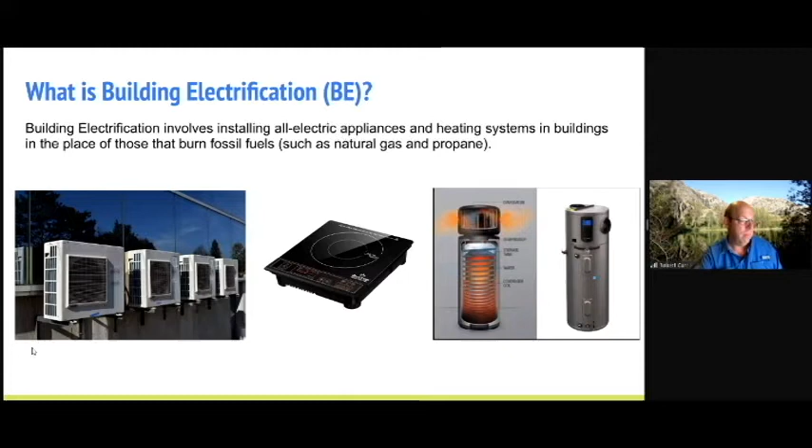So why is it so important? Well, as we know, we need to start reducing the amount of emissions, CO2 and methane, we put into the atmosphere. Many cities have really strong climate action plans and GHG reduction targets. And none of those can be met unless you actually deal with the emissions associated with buildings, essentially. And methane gas is one of the main things one targets.

Health benefits. If you have a gas stove, please turn on that vent that should be above it. Because when you burn natural gas, the byproducts are nitrogen oxides. There's fine particulate matter. There's formaldehyde, among several others. All of which have bad health consequences, especially if it's not vented to the outside. You're talking about lung issues, asthma, cardiovascular issues. The list goes on. It's quite extensive.

So if you do cook with gas, please use your vent. Use your vent and open the windows. And then when you get a chance, use induction cooktop stoves. Lower cost: when you build a building, if you do not have to install the gas infrastructure from the main line, wherever that is in the street, to the building and inside the walls, you're saving money. You just don't have to install that infrastructure.

Also, because of the increased energy efficiency of the appliances, they are cheaper to operate and run over their lifetime. Right now, there's lots of talk about natural gas being cheaper than electricity, but if you pencil it out, it's actually not the case in most situations. And then finally, the public safety of using methane gas in buildings. You have to extract it somewhere in the world. You have to process it. You have to ship it. You have to store it. You have to deliver it. And all along those lines, there's leakage, possibility for fires.

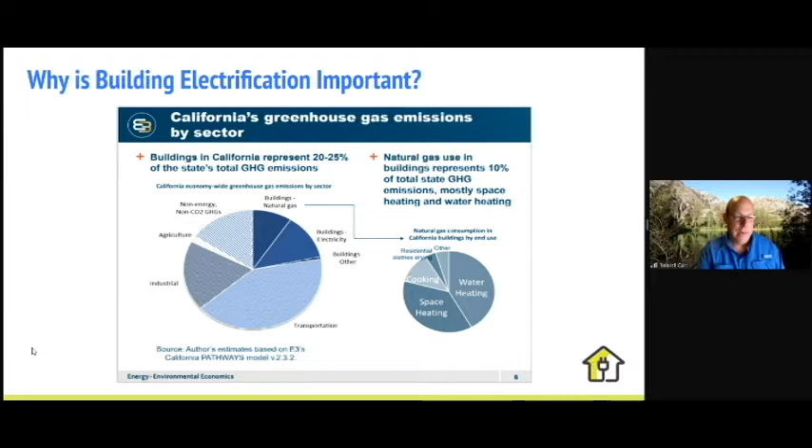And this is the last slide before I hand it off to Tom. So currently, right now, this was 2019. I think this is higher for sure. An estimated 36% of California's electricity comes from renewable sources, all right? And that should be up to 60% by 2030. And on the right-hand side, it shows that 63% of the energy in California is carbon-free.

So what is carbon-free? Carbon-free includes renewables, but also includes hydroelectric and nuclear, because neither of those two are renewable, but they are carbon-free. So if you add all that up, you've got 63% of our power is carbon-free, with 100% being the goal in 2045.

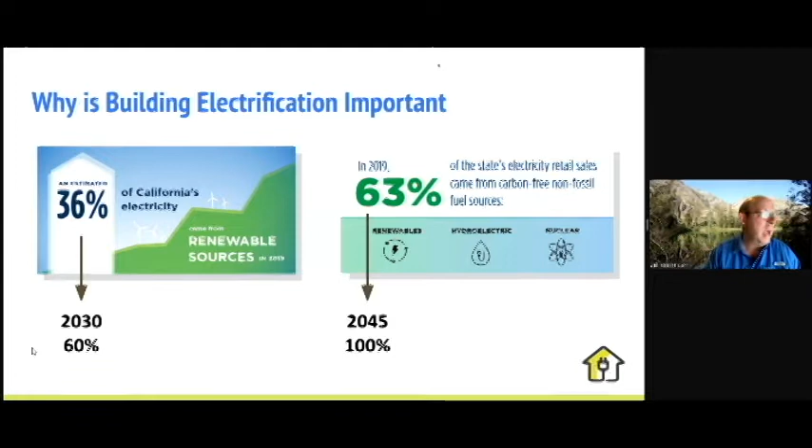So if we can deliver renewable carbon-free energy to electrified homes and all the buildings electrified, theoretically, we can bring those emissions down to close to zero. So that's why it's so important. If we electrify our buildings and we clean our grid, that's how we get these emissions associated with buildings going away. So I'm going to go ahead and stop sharing, and I'm going to let Tom take over from there.

All right, thank you, Robert. Let me advance this.

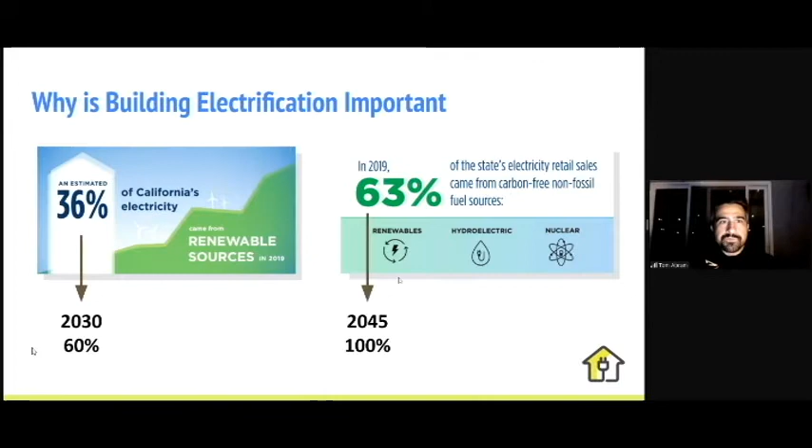All right, so I'm going to talk about each of the different areas of electrification in terms of what components you might electrify within a building. So starting with space heating, typically when we're talking about electrification for space heating, we're talking about heat pumps. And so heat pumps are moving heat from the outside to the inside. So even when it's cool outside, there's still heat until we bring that temperature all the way down to absolute zero. There's still something we can squeeze out of it.

So at the end of the day, it's moving heat from one place to another. It is basically an air conditioner that runs in reverse. It's effectively 250 to 400% efficient, depending on climate conditions and model. This is several times more efficient than a natural gas furnace, which theoretically may get up to 97, 98% with a high efficiency condensing furnace, or an electric resistance heater, which is 100% efficient.

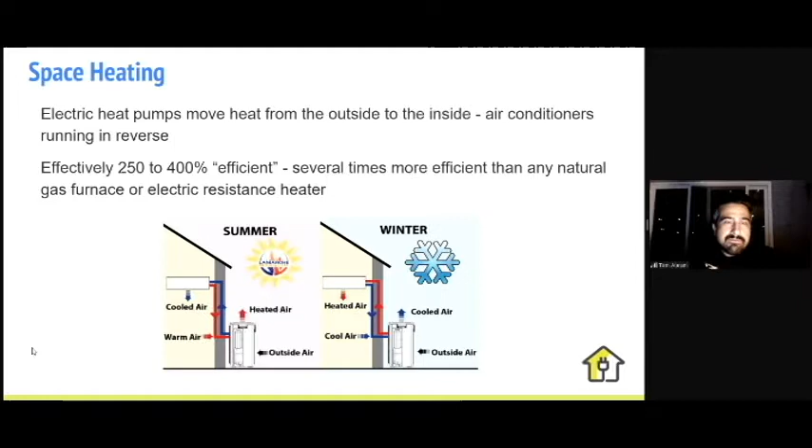So we're not converting one type of energy to another. We're just moving heat from one place to another. So we're able to get these really high efficiencies. So with a space heating system, especially if we're talking about existing or traditional systems, you might have a centralized system with a gas furnace providing heat. A lot of times in San Diego, we've got distributed systems where we might have wall furnaces or baseboards or mini splits. And then we may or may not have a system that's paired with air conditioning.

So if we're looking at doing a replacement of a gas or propane unit to electric, typically maintaining the same distribution system is going to have the lowest upfront cost. If we already have central heating, then it's probably going to be the least cost to swap your furnace with a heat pump.

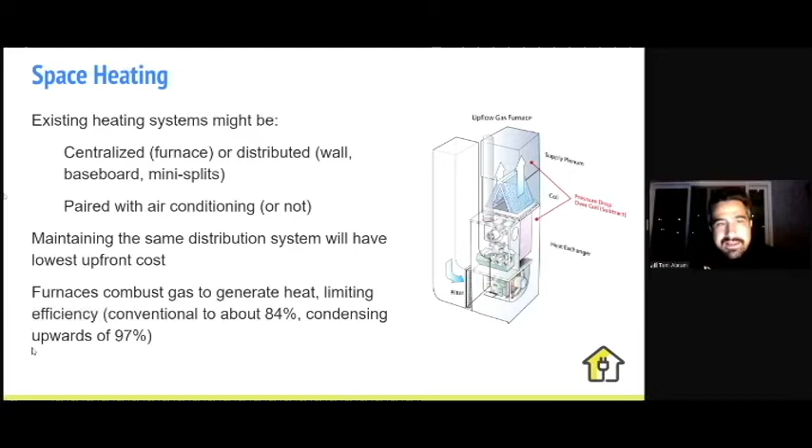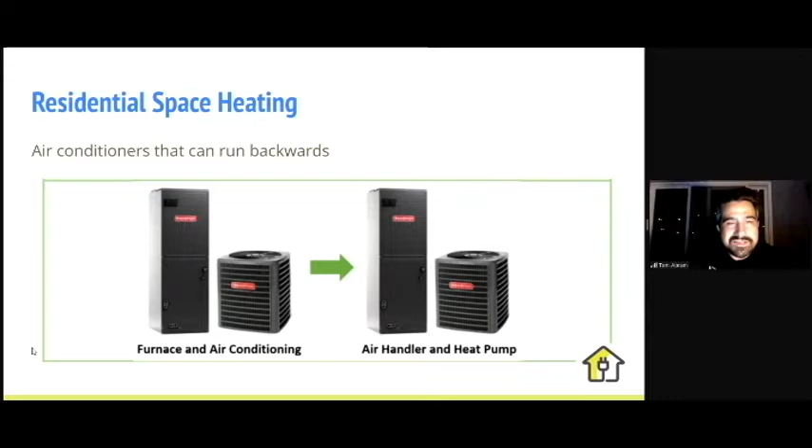So what does it look like? Well, in residential space heating, when you squint, it looks exactly the same as a lot of traditional systems. So if you have a furnace and an air conditioning unit with an outdoor split unit, then when you electrify that, either in an existing or a new application for a central system, it looks basically the same. All you've got is a reversing valve at the heat pump that lets the refrigerant flow backwards, and we don't have the furnace, just the air handler. So this is what would be called a box swap, basically a 1-for-1. If you've got an existing system and you want to electrify, this is a great option.

There are some other options available, especially if you've got a situation where you might have wall furnaces and window air conditioners, or even in some cases if you've got a central system, these ductless mini splits are very efficient. So you can get SEER, seasonal energy efficiency ratio, for these mini splits at 20 or more. It's oftentimes a lot more efficient than the central systems. And you get a little bit more controllability too. They do tend to be more efficient. And you could put multiple indoor units on one.

For kind of lower costs, if you've got window air conditioners, let's say, especially in rental situations, an easy swap is just a window heat pump. So they have heat pumps that are window units that just go backwards. These aren't nearly as efficient, but they are a lot lower cost, especially if we're looking potentially at rental units, let's say, for a swap.

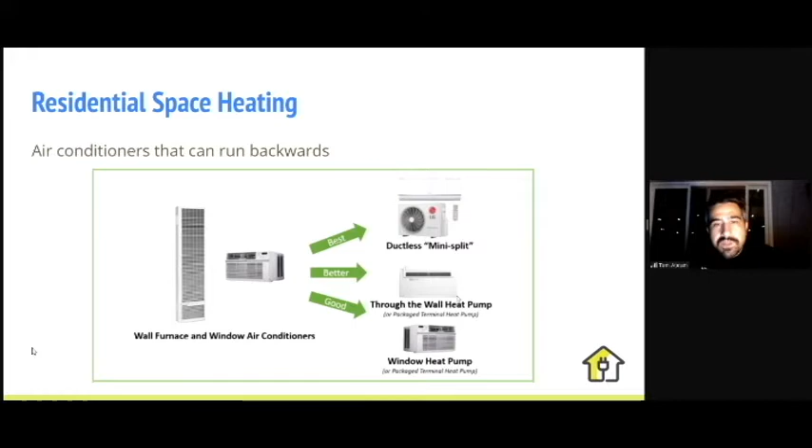When we look at the greenhouse gas comparison of these, looking at the CO2 equivalent for a natural gas furnace and electric resistance and heat pump, if we're trying to provide one therm of heating to a space, a natural gas furnace is going to be on the order of 14 pounds of CO2 equivalent per therm. Electric resistance, even though they've kind of been the bad boys of heat in California and elsewhere, from a carbon perspective, they're less carbon intensive now because the grid has gotten so much cleaner. So they beat a gas furnace, but we could do better.

We could go down to a heat pump with what's called a COP of 3. That means for 1 unit of electricity, you could move 3 units of heat. So a lot more efficient than other options. And the beautiful thing about that is now that it's electric, you could eliminate those carbon emissions by using on-site solar as well. So once you pair your electrified system with solar, you could negate your carbon emissions.

One thing I'll note: this doesn't include fugitive emissions. With natural gas, upwards of 3% is being lost as leakage, and methane, especially in a 20-year window, is 85 times more impactful than carbon dioxide on a per molecule basis. There's a lot of question as to what that leakage rate actually is, anywhere between 1 to 3%. But it is important to keep in mind that we need to be addressing those emissions too.

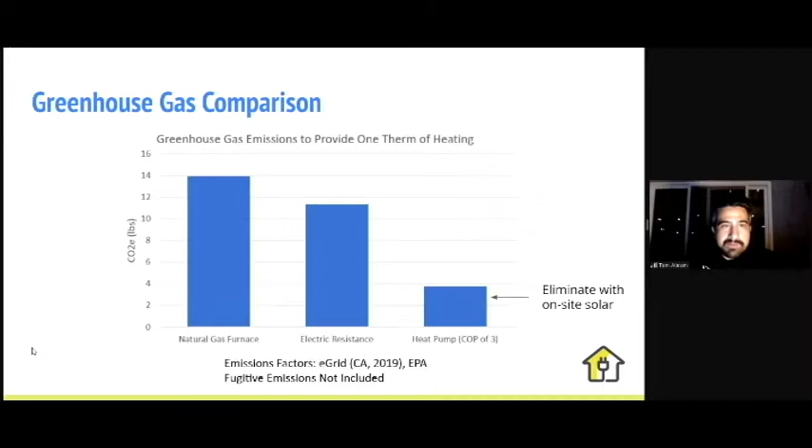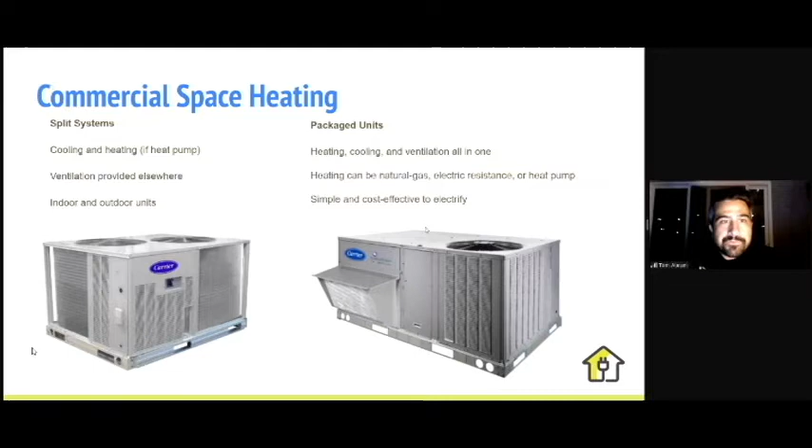Moving on to commercial systems, a lot of times we have units that look exactly the same as the residential. We've got split systems that provide cooling and heating. We also have package units where we've got heating, cooling, and ventilation all in one. So we're bringing in fresh air, and we're also providing heating and cooling to spaces. The heating on these could be natural gas, electric resistance or heat pump. The majority of them in California are heat pump already, so we're already using a lot of heat pumps, at least on commercial spaces. These are really simple and cost effective to electrify. If you've got a package unit, it's basically a 1-for-1 swap when it's time to replace that unit.

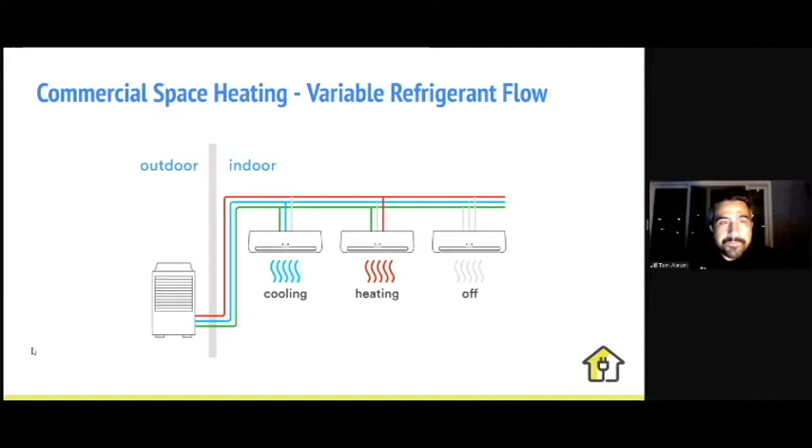Other options are VRF or VRV, variable refrigerant flow or volume. Very similar to these split systems, but it's got multiple indoor units being fed by one outdoor unit. The nice thing about this system is it can be in cooling and heating mode at the same time. If you've got a commercial building where you might have a lot of heat load in one space, you need cooling, but you might have another area that needs heating. You could actually do heat recovery where you're essentially moving heat from one interior space to another interior space. There are some associated emissions from refrigerant leaks, depending on the type of system, that you need to be careful about with these as well.

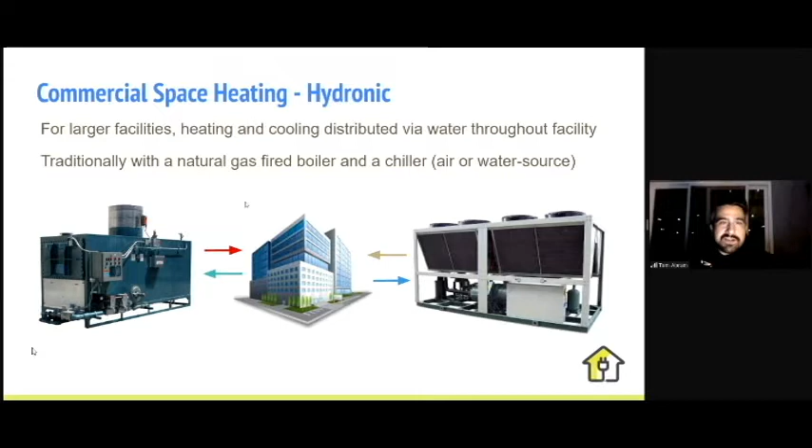When we go to larger buildings, we tend to see heating and cooling that's distributed via water throughout the facility. That's traditionally done from a heating perspective with a natural gas-fired boiler. And then with cooling, we've got an electric chiller, either air or water source. When we electrify these larger spaces, we tend to use, again, some sort of a heat pump system. So it could be an air source heat pump, basically a chiller that can run backwards now. We also have heat recovery chillers that can provide both hot water and cold water at the same time, especially for larger buildings that might be using VAV reheat.

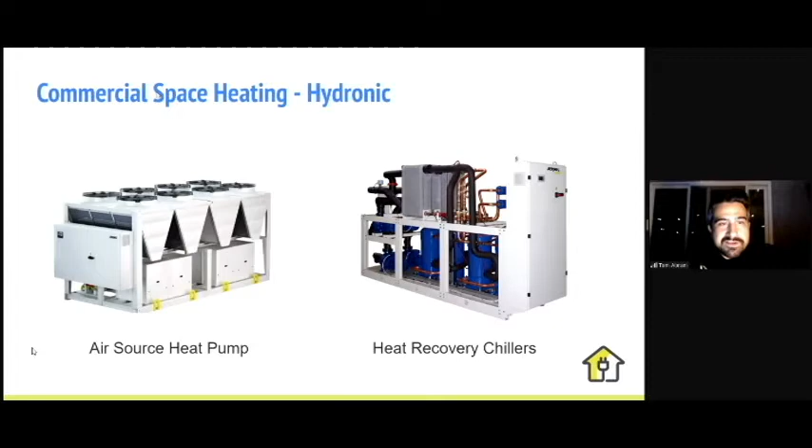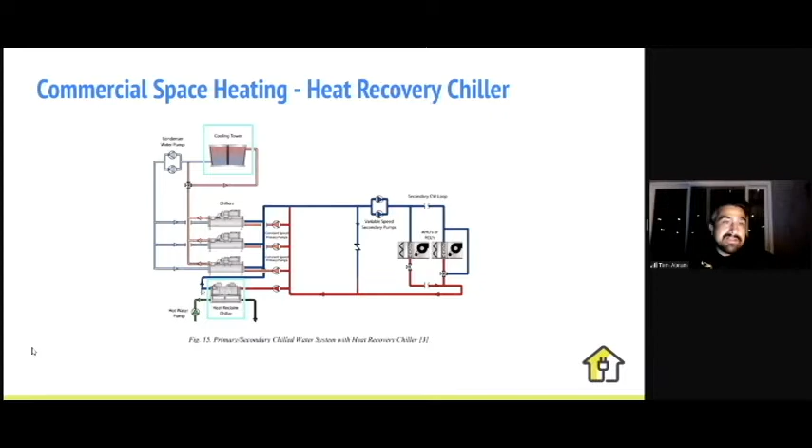Essentially, with some of these pretty standard systems with hydronic, we have cooling towers that are evaporating the water. Basically, we're rejecting the heat from the indoors to the outdoors, and we're using a cooling tower to do it with less energy. However, that's a lot of heat that we could be using for something valuable when we need heating. So we could use these heat reclamation or heat recovery chillers to reject that heat to a hot water loop that we could then use for space heating. We could also use it to provide some heating for domestic hot water as well.

As Robert mentioned, they're extracting heat from the ambient air and then they're rejecting it to domestic water. A lot of these units do have backup electric resistance. Again, if we're able to run it in heat pump mode, we're probably running at 250%, maybe 300% efficient. When we move to electric resistance, we're bringing that down to 100%. Most of all the current units are 240 volts, but there are 120 volt plug-in styles coming out this year.

If you already have an existing electric resistance water heater, you could put one of these in and reduce your electricity consumption on the order of 70%. If you have gas, then there are a little bit more challenges, especially while there's still 240 volts. That'll become a little bit easier in the future, but you'd have to think about some rewiring.

There are some minimum space requirements with these heat pump water heaters. They like having a little space because they're pulling heat from the air. Another option to be able to handle that is by ducting that unit. So you could send that cool air elsewhere or pull the warmer air from somewhere else.

Another electric option is the electric tankless. They do require quite a bit of amperage and are less efficient. Again, at the most, they're going to be 100% efficient. You do not have the standby losses, so there is a little bit of a benefit there, but on the whole, you're going to use less energy with the heat pump water heaters. And with the large current draw, depending on the size, it could be 100 amps just from the electric tankless alone. So it does become more challenging from an electrical perspective.

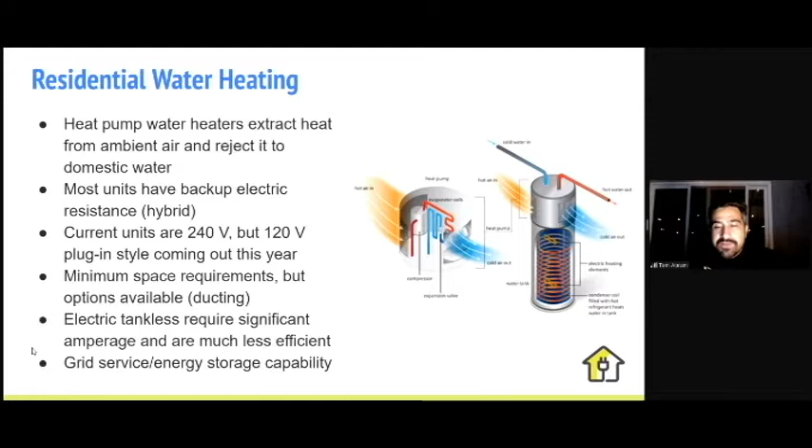From a multifamily or commercial water heating perspective, an option could be distributed water heaters, one per unit if it's in a residence. And this is basically the same as the previous slide. You just have these heat pump water heaters, tank style, within each of these units. Another option might be a centralized hot water heating plant.

This is a product that actually uses CO2 as a refrigerant. CO2, while it is the predominant molecule responsible for climate change, has a global warming potential of 1, whereas some of these refrigerants might be in the thousands. So from a refrigerant perspective, CO2 is a lot less harmful to the environment.

These are kind of interesting in that they make the hot water in these little units that look like split HVAC units, and then they store the water in a hot water tank. So this makes it a lot easier for retrofit situations as well. Another option would be a hybrid approach where you're kind of doing maybe a few water heaters per floor.

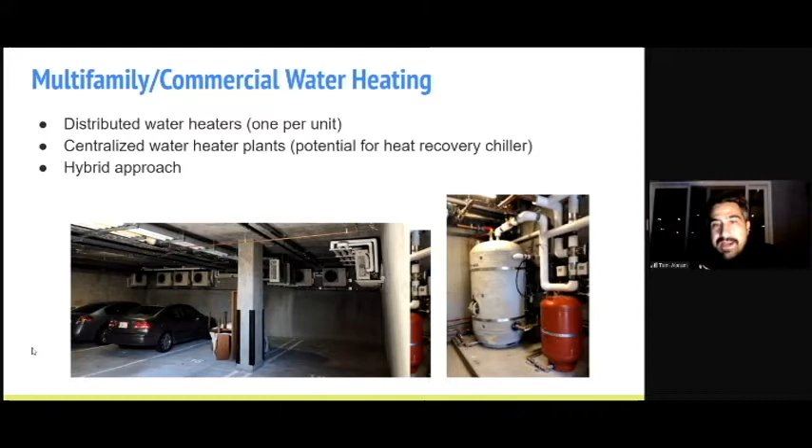From a cooking perspective, a lot of people don't care for electric cooking. This is one of the areas where we see more resistance from certain stakeholders, because people have this emotional attachment to their gas cooking devices, even though from a health perspective, it has the worst health impacts compared to some of these other devices in our homes.

Nice thing is we do have these electric induction units now that cook a lot better. They basically generate magnetic fields and convert that to a current that gets converted to heat within our cookware. So we're basically heating that cookware directly rather than heating a coil, which then has to heat the cookware. So it does end up being more energy efficient than electric resistance. It also turns off if you remove the cookware.

You do need to have some, I don't like saying special, because it's cast iron, it's enameled cast iron, it's a lot of stainless steel. You just have to make sure you're using the right cookware. Although there are plates you can get to allow any cookware to work. Really fast to heat. Ours, by the time I'm grinding my coffee beans, the water's already hot because these things just cook really fast, easy to clean, great control.

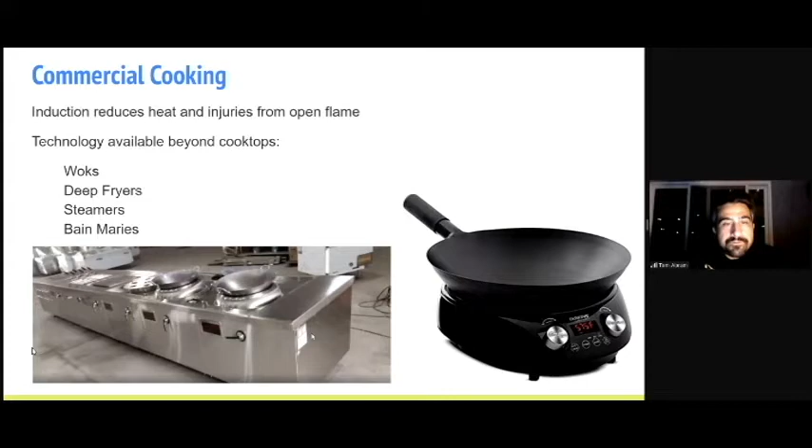A few different options on the dryer side when we electrify. There's the standard electric resistance vented dryer. It's the most energy intensive of the electric options, but it is faster to dry. We also have various ventless types, the standard condensing dryers, which are more energy efficient. The neat thing about these is you could get combined washer dryer units that you put your clothes into one machine, it washes it, then it dries it for you.

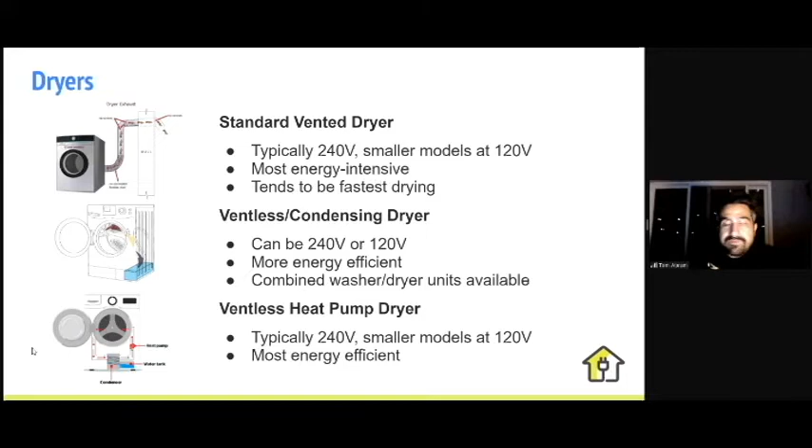And then finally, our friend the heat pump, we have ventless heat pump dryers available now, which is going to be the most energy efficient, next to, you know, the sun, if you put your clothes out on a clothesline.

In terms of managing our electric panel, as we're adding all these electric devices, this will increase the load on our electrical panels. So we want to make sure that that panel board can handle additional utility power and distribute it throughout the home. Some strategies to be able to manage that are, if we use high efficiency equipment, then we can reduce the size of the electrical service.

With combined units, if we've got a combo washer dryer, or if we've got a range that combines the oven and the cooktop, then that reduces the electrical service as well. Right sizing our HVAC, we can do energy efficiency, envelope improvements. We can get a smaller HVAC unit.

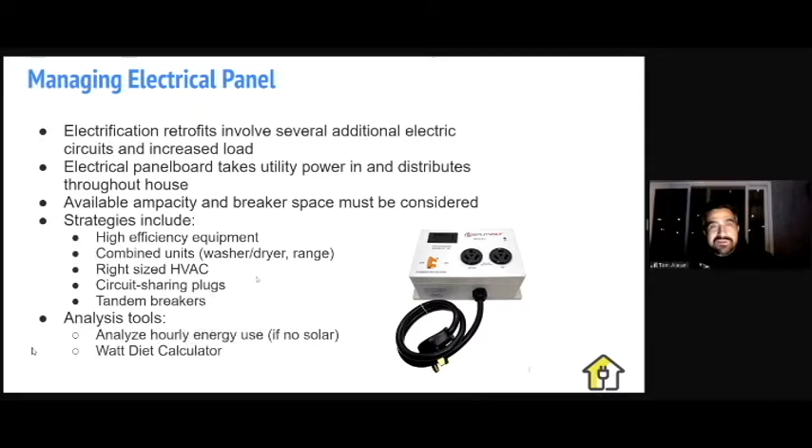We do circuit sharing plugs. So this is pretty neat. There's this company, SplitVolt. There's another, NeoCharge. And it's basically a smart outlet for two 240-volt appliances. So you could put your dryer in one, your electric vehicle in the other. And when the dryer kicks on, the EV pauses the charging for a little while and then picks it up again when the clothes are dry.

Let's see. There we go.

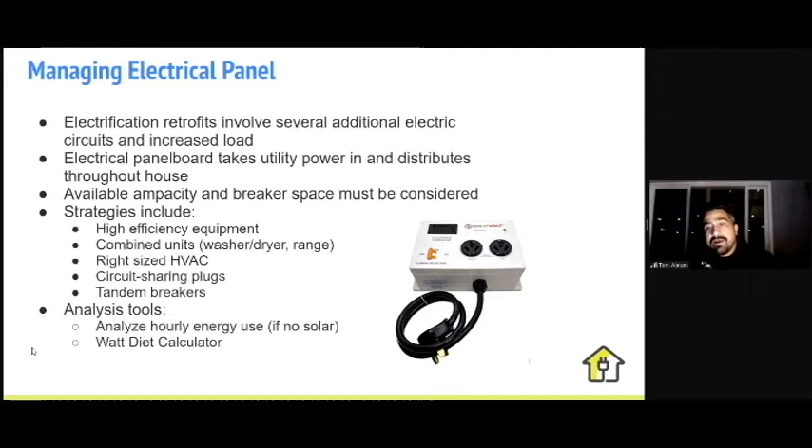So some tools for that, we could be looking at hourly energy use before we have solar to kind of look at what our loads are. We could also use the Watt Diet calculator that a guy, Tom Kabat, up in Menlo Park has developed to see whether you need an updated panel or not based on electrical codes.

And what really ties this all together is solar. So electrification allows you to be able to cover all of your energy use with solar. Rooftop solar improves the economics of electrification, especially in areas like San Diego where we have high electric rates. When we pair it with rooftop solar, then we're able to offset all of it.

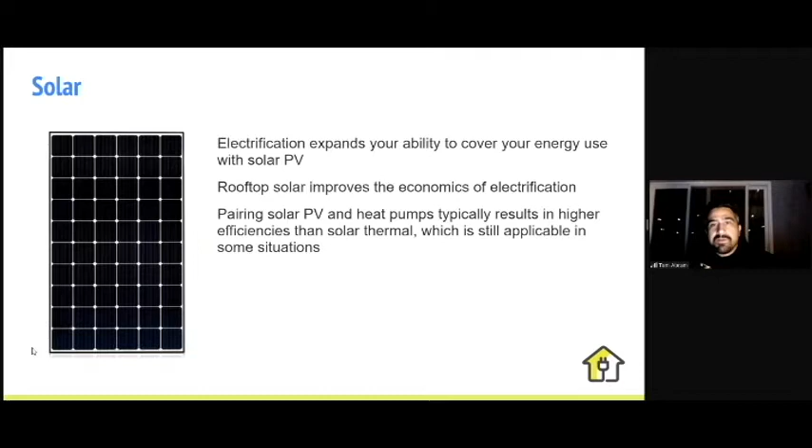And when we pair solar PV and heat pumps, that typically ends up being more efficient than solar thermal, which of course there's still some great opportunities to apply solar thermal, especially in pools, etc. But the efficiencies actually end up being higher because of the coefficient of performance from the heat pumps being, you know, up to 3 or so.

So just gonna run down and do a quick review of my home here, the eCorinthian. Our home is all electric. We shut off the gas at the end of last year. We're located in El Cerrito, 1,500 square foot. It's built in 1949, and we bought it right after a major remodel was done in 2015.

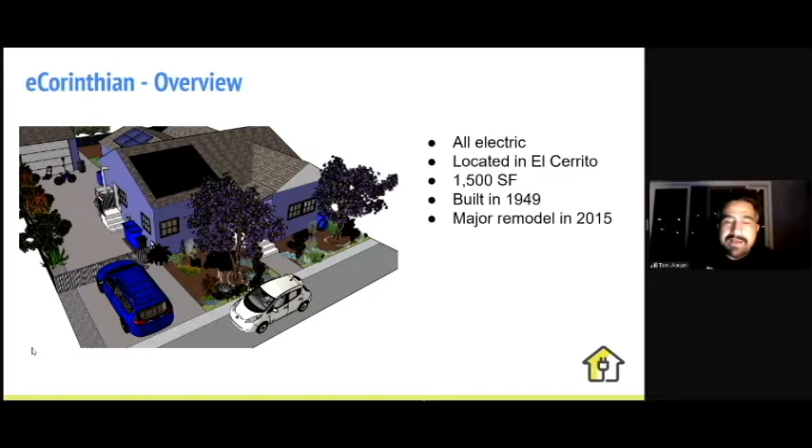So we moved in April of 2015. The first thing we did to electrify was put in a heat pump for our space heating. We did not have air conditioning at the time, and after a few weeks of a hot spell, we went ahead and put it in and made sure we selected a unit that was able to provide heating as well.

Then we put in our initial solar array after we had a year's worth of data on our energy use, and that was able to supply all of our electric needs until we got our electric vehicle, our plug-in hybrid Chrysler Pacifica. So this goes about 30 miles on electric before it shifts to gas, but that meets most of our needs here.

And then another thing we did is, I like to call this electrifying on the cheap. This is that portable induction cooktop. You just plug it in the wall and see if you like how induction works for you. We liked it. We cooked on that for about 2 years as our primary cooktop.

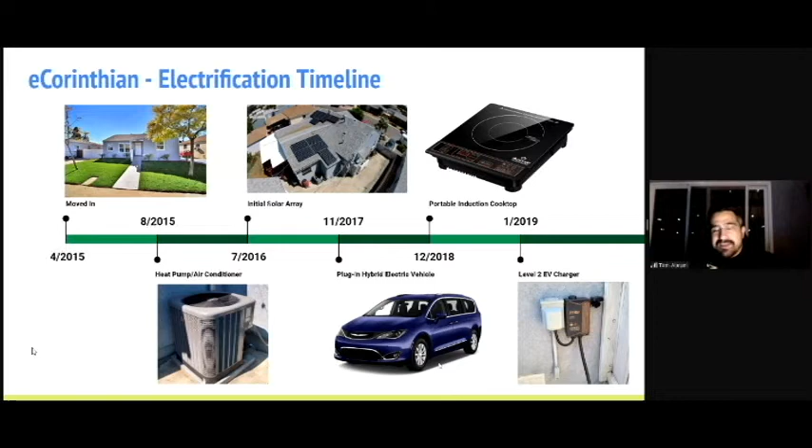Put in a level 2 EV charger to be able to maximize the electric on the EV. Got a second EV, a used Leaf. And then put in our heat pump water heater right when the pandemic was kicking off, April of 2020. Had a hard time finding contractors at the time to put one in, so I ended up doing it with a friend. It passed inspection, and it's working fine.

Knowing that we were moving our last couple appliances off, we went ahead and expanded our solar array. It's a 6.5 kW system, and it supplies our water heating, space heating, and standard electric devices, as well as our induction range and our dryer.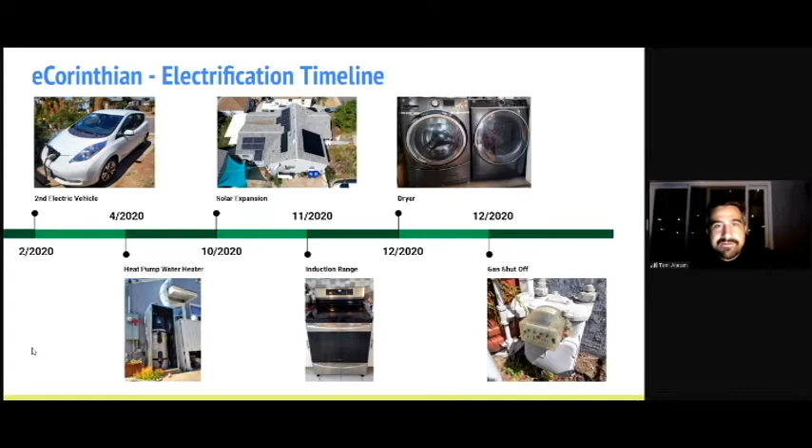And finally, in December of 2020, so just under a year ago, we shut off our gas. We've had the solar for over a year. We haven't quite been all electric for a year, but it looks like we're going to be net positive from an energy standpoint.

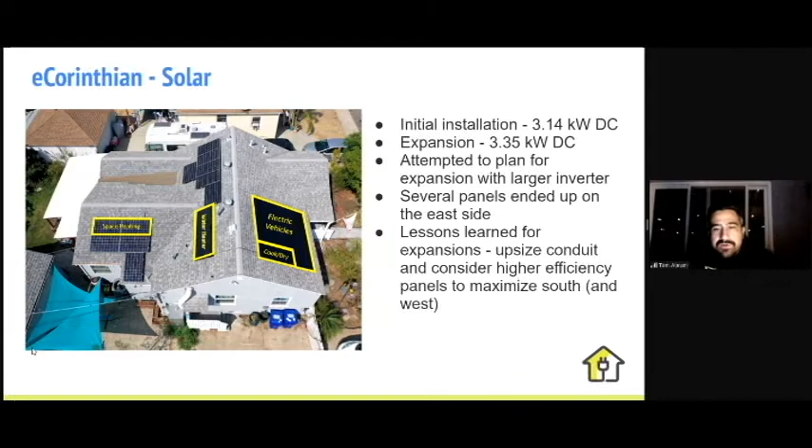We tried to plan for this expansion, knowing we were going to go all electric one day, by putting in a larger inverter. So we did not have to change out our inverter when we added more panels. We did end up with some panels on the east side because there wasn't as much room elsewhere. Some of the lessons were, I might have gone with higher efficiency panels so that I can squeeze more on the south and the west. Would have liked to have upsized the conduit. They had to redo some conduit work because that was not upsized. So I think that's key for a lot of this, just plan ahead.

In your journey on electrification, you can loan out a portable induction cooktop. And if you like it when you're borrowing it, you can pick one up. They're about $50 or $60 online. It's a great way to electrify on the cheap.

Another thing I recommend doing is determining how old your water heater, your HVAC equipment, and your other appliances are, to help you determine your approach. Are you going to be replacing these upon failure, or are you going to expedite it? It's important to have that plan ready, because when your water heater goes out, you're going to want hot water.

You also can prioritize based on overall impact from a cost, carbon, health perspective. From a cost perspective, I found that the space heating and the water heating had the highest savings and quickest payback, and that kind of translates on the carbon side. You get a big carbon benefit when you shut off the gas too, because you reduce any potential methane leaks in the home. And then looking at health, obviously, cooking is a great one to prioritize.

Want to strategize your electrical panel with needs for all electric. If you're doing it piecemeal, try and get that whole panel planned out. Let the electrician know that this is what you're planning to do. We had them come out a couple of times. We probably could have cut out a visit if we had planned ahead. Size the solar with future needs in mind, and you could get some no-cost help.